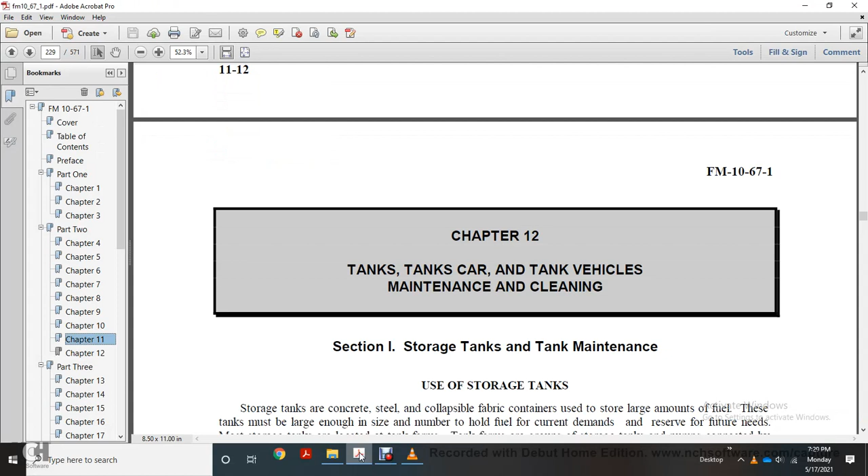Use of storage tanks. Storage tanks are concrete, steel, or collapsible fabric tanks used for the storage of large amounts of fuel. The tanks must be large enough in size and number to hold the current demand and future need. Most storage tanks are located in tank farms.

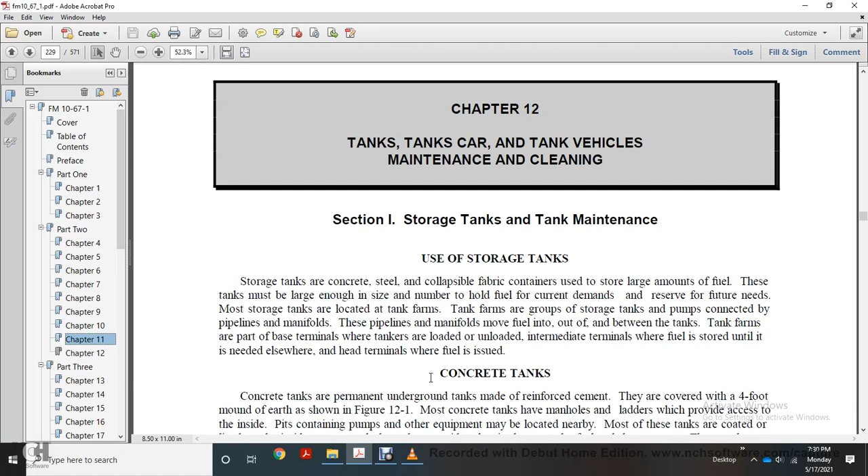Tank farms are groups of storage tanks with pumps connected to a pipeline manifold. The pipeline manifold moves fuel in and out between the tanks and the tank farms, used at the base terminal where tankers are loaded and unloaded, at intermediate terminals where fuel is stored until needed elsewhere, and at head terminals where fuel is issued.

Concrete tanks are permanent underground tanks made with reinforced cement. They're covered with about 4 feet of earth as shown in figure 12.1. Most concrete tanks have manhole ladders providing access to the inside, and pits containing pits, pumps, and other equipment may be located nearby.

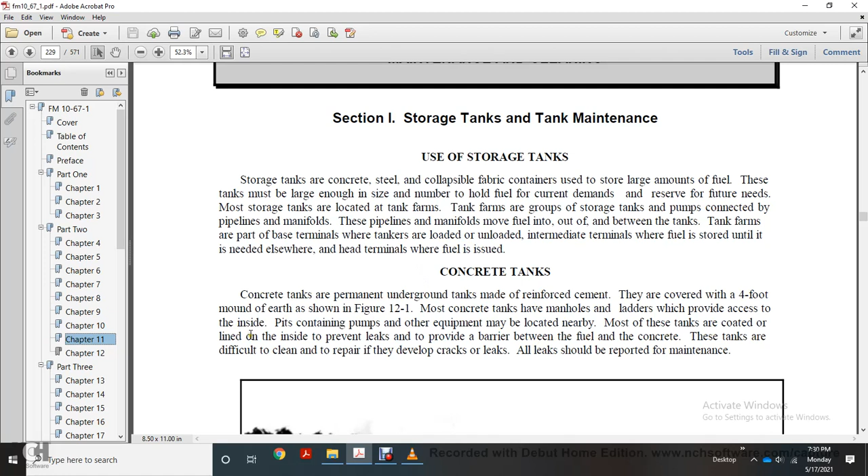Most tanks are coated or lined on the inside to prevent leaks and provide a barrier between fuel and concrete. These tanks are difficult to clean and repair if they develop cracks or leaks. All leaks should be reported to maintenance. The figure shows an earthen mound covering a concrete tank.

Steel tanks are made with metal plates called staves. The staves are bolted or welded together. Bolted tanks are shown in figure 12.2, and come in 100, 150, 250, 1,000, 3,000, and 10,000 barrel sizes.

Neoprene rubber gaskets are used to seal the edges of the staves to prevent leaks. Bolted tanks are used above ground, semi-permanent, because they can be taken down and reassembled at a new location. Bolted steel cone roof tanks used extensively by the military have free vents for high vapor loss. Welded tanks are shown in figure 12.3, page 12.3.

When tank volume exceeds 10,000 barrels of fuel, they are built as permanent, above-ground or buried tanks covered with cement or earth, because construction requires skilled personnel. Above-ground tanks may have floating roofs, as shown in figure 12.4, page 12.3.

This roof moves up and down with the fuel level, reducing the vapor space above the fuel and lessening the chance of fire or explosion. The welded cone roof tank is better suited for storage of highly volatile products than the bolted steel tank. In areas subject to bad weather, floating roof tanks with permanent covers or domes have been developed for use.

Above-ground bolted or welded tanks shall be built on a level foundation with adequate drainage; a concrete slab or concrete ring foundation is preferred. The outside of above-ground tanks shall be painted a light color to protect them from corrosion and reflect heat. Each tank shall be surrounded with a firewall high enough to contain all fuel in the tank in the event of a leak, and a safety margin of 1 foot shall be added to the height of the firewall.

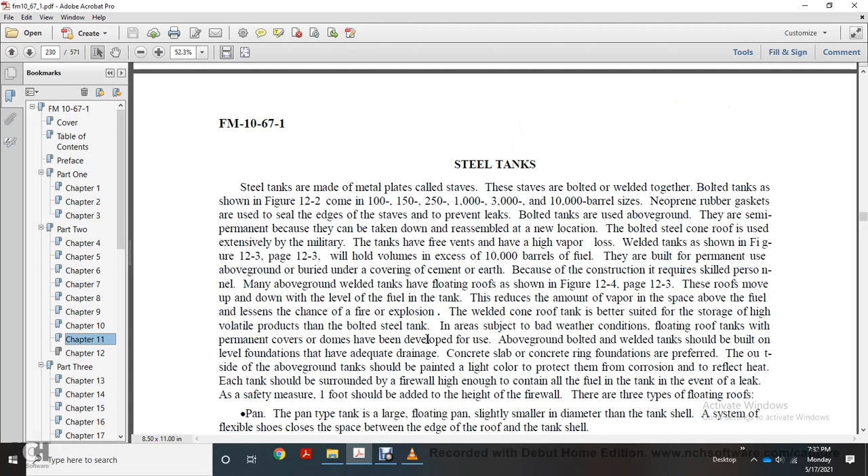The three types of floating roofs are pan, pontoon, and double deck. The pan type is a large floating pan, slightly smaller in diameter than the tank shell, using a flexible shoe to close the space between the edge of the roof and the tank shell. Pontoon tanks have a system of closed compartments or pontoons improve the floating stability and simplify the structure.

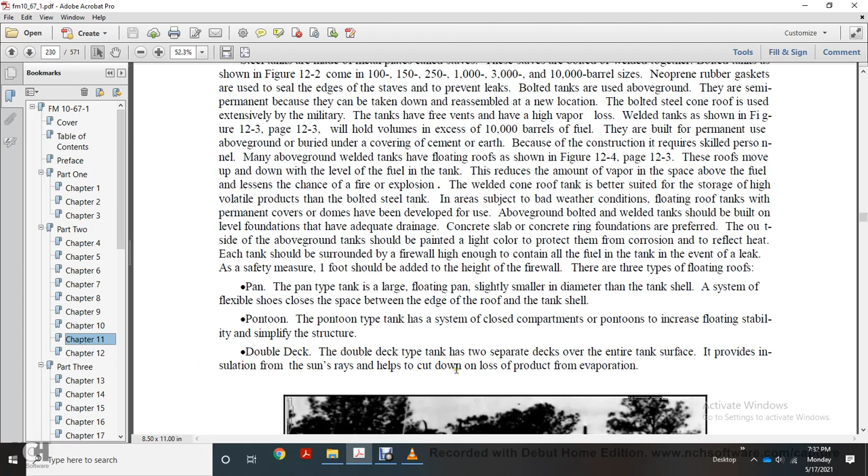Double deck floating roof tanks have two separate decks over the entire tank surface, which provides insulation from the sun's rays and helps cut down product loss from evaporation.

Figure 12.2 shows a bolted steel tank, figure 12.3 shows a welded steel tank, and figure 12.4 shows the cross-sectional view of a floating roof tank.

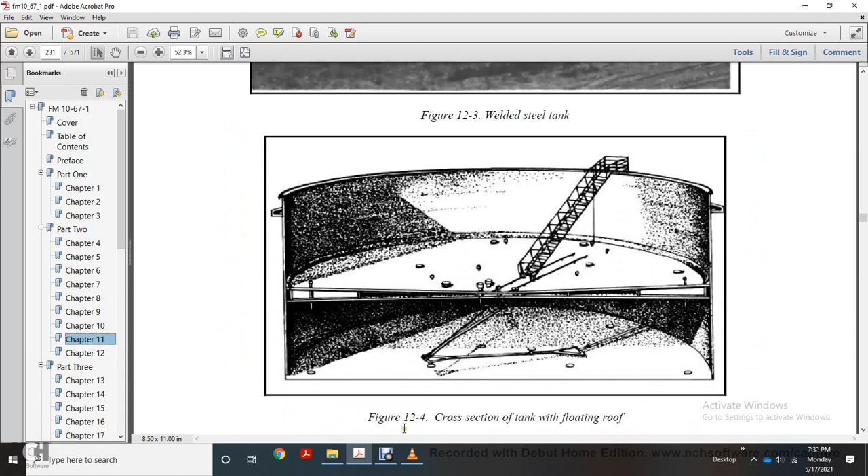Collapsible tank: Collapsible fabric tanks are shown in figure 12.5, made with elastomeric-coated nylon, currently available in 3,000, 10,000, 50,000, and 210,000 gallon sizes, used for temporary fuel storage at beachheads, FSSPs, and tank farms.

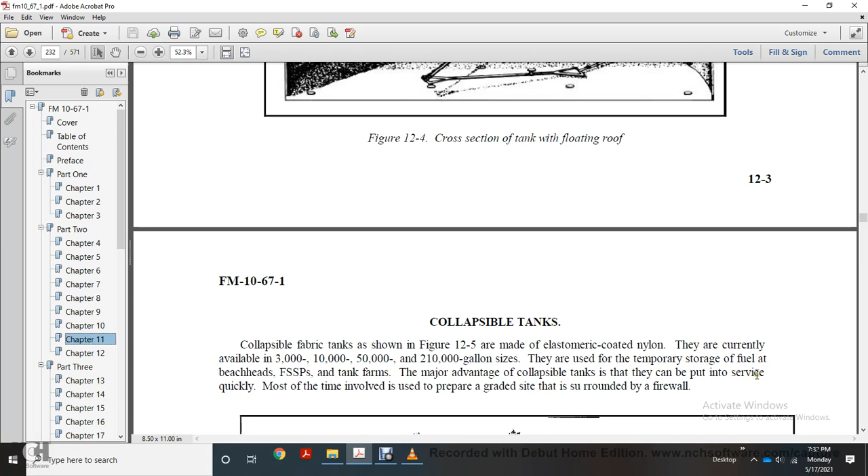The major advantage of the collapsible tank for tank farms is that it can be put into service quickly; most of the time involved is in preparing a graded site surrounded by a firewall. Figure 12.5 shows the collapsible fabric tank.

The inspection should be taken whenever the tank conditions show evidence of exterior excessive interior rusting, liner deterioration, and microbiological problems, both sludge and the ability of the tank to maintain the quality and integrity of the product being stored and issued. Any maintenance necessary should be performed as soon as possible. The results of the inspection and maintenance of the storage tank should be recorded on DA Form 4177.

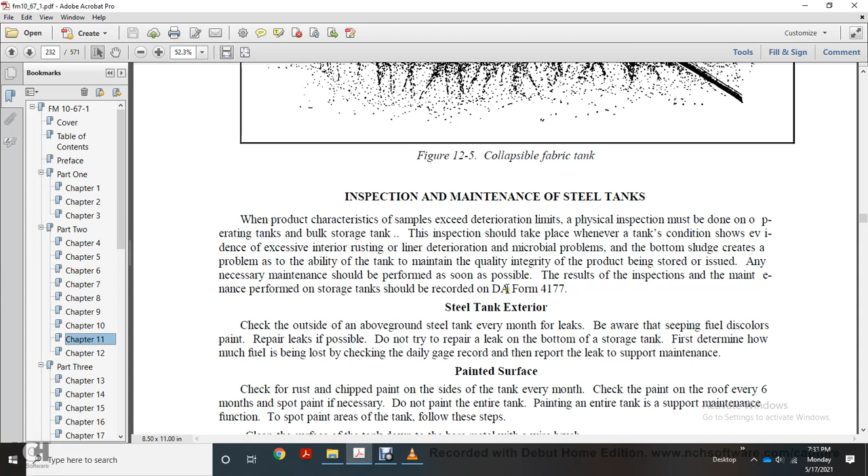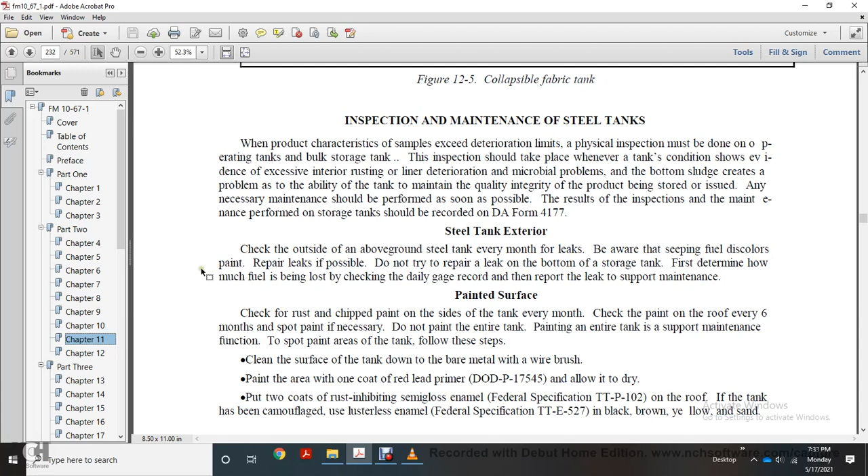Exterior tank, steel tank exterior: check the outside of the above ground steel tank every month for leaks. Be aware of seeping fuel and discolored paint. Repair the leak if possible. Do not try to repair a leak at the bottom of the storage tank until you first determine how much fuel is being lost, checking the daily gauge record, and then report the leak to support maintenance.

Painted surface: check for rust and chipped paint on the side of the tank every month. Check the paint on the roof every 6 months and spot paint as necessary, but do not paint the entire tank. Painting the entire tank requires support maintenance functions; only spot paint the areas needed on the tank.

Follow these steps: clean the surface of the tank down to bare metal with a wire brush. Paint the area with 1 coat of red lead primer, DOD P17545, and allow to dry. Put 2 coats of rust inhibitor semi-gloss, federal specification TTP-102, on the roof. If the tank has been camouflaged, use lusterless enamel, federal specification TTE-527, in black, brown, yellow, or sand.

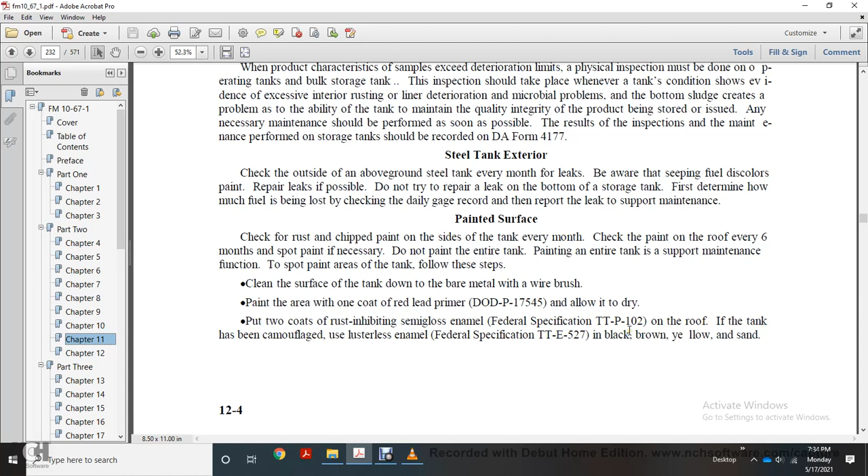Floating roof: check the seal over the floating roof frequently. Make sure it is in good condition, tight and sealed. Report any damage to support maintenance. Check the roof daily in rain, freeze, or snowy weather. If the seal has frozen to the tank surface, unfreeze the seal before raising or lowering the roof. Shovel the snow off the side of the tank as soon as possible to prevent collapse of the roof from the weight of snow.

Swivel joint pipe drain hose: drain the water off the roof daily. Open the roof drain valve located on the tank shell at the bottom of the swivel pipe drain hose. Keep the pipe drain free of water during freezing weather.

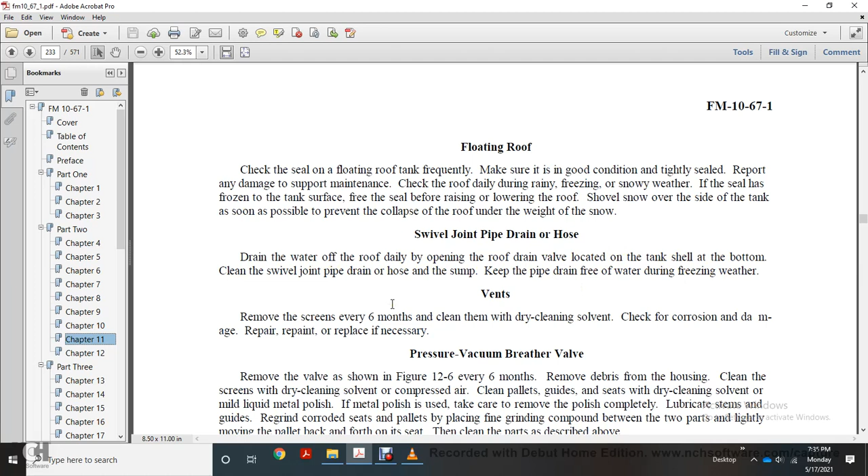Vents: remove the screen every 6 months and clean with dry cleaning solvent and a cloth. Check for corrosion and damage, repair and repaint as needed.

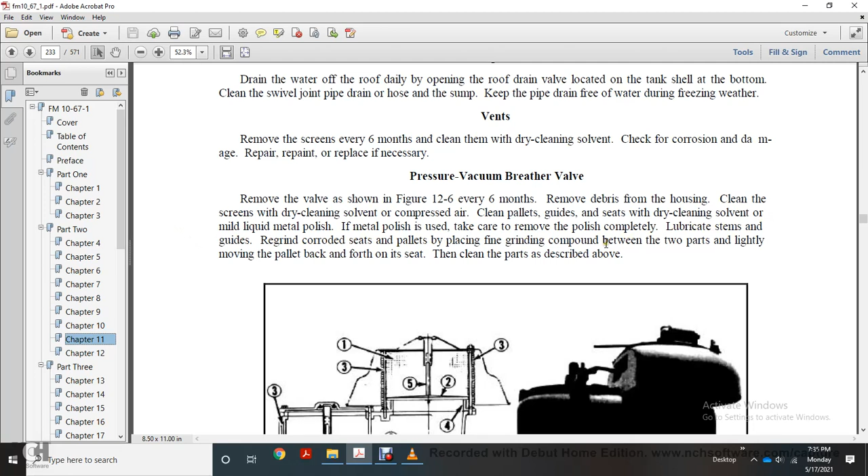Pressure vacuum breather valve: remove the valve as shown in figure 12.6 every 6 months. Remove debris from the housing, clean the screen with dry cleaning solvent and compressed air, clean the pallets and guides with dry cleaning solvent and mild liquid metal polish. Metal polish should be used with care. Remove the polish completely, lubricate the stem and guide, and regrind corroded seats and pallets using fine grinding compound between the two parts, lightly moving the pallet back and forth on the seat. Clean the parts as described: 1 is screens, 2 is pallets, 3 is guides, 4 is seats, 5 is stems.

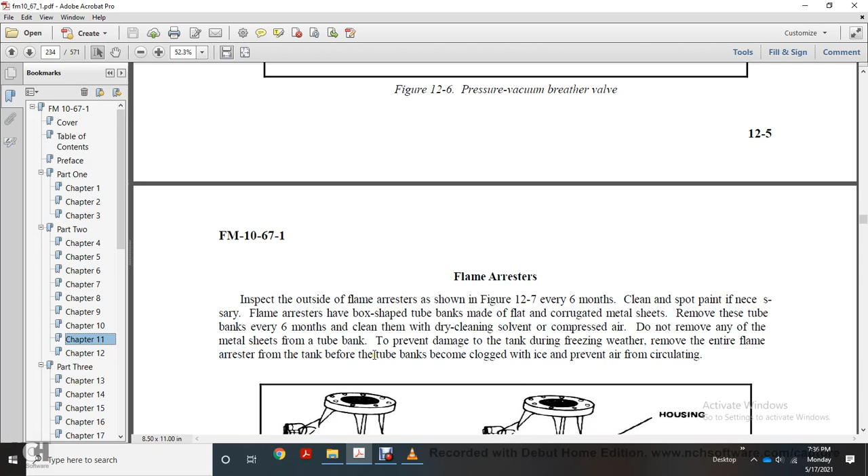Pressure vacuum breather valve, flame arrestor: inspect inside and outside the flame arrestor as shown in figure 12.7. Every 6 months, clean and spot paint as necessary. The flame arrestor is box-shaped tube banks made of flat corrugated metal sheets. Remove these tube banks every 6 months and clean with dry cleaning solvent and compressed air. Do not remove metal sheets from the tube banks. To prevent damage to the tank during freezing weather. Remove the entire flame arrestor from the tank before the banks become clogged with ice, which prevents proper circulation. This shows the housing of the two banks and the cover, the flame arrestor and banks.

Liquid level gauge: follow the manufacturer's instructions for maintenance if necessary. Place silica gel inside the gauge to absorb moisture and prevent condensation in the glass.

Gauge and thief hatch: check the hatch cover once a year and replace if damaged. Remove the pins in the hatch, put a new cover in place, and replace the pins. Check the seal of the cover once a year for cracks or damage, and replace the seal if necessary.

Manhole cover: check the manhole cover gaskets regularly and replace if damaged. For the cover gasket, remove the pins, washers on the hinge, remove the damaged gasket, put a new cover and gasket in place, and replace the pins and washers.

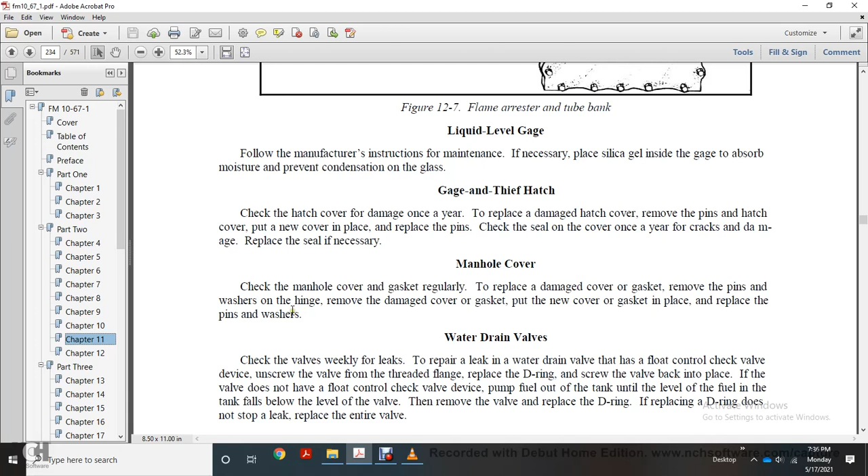Water drain valves: check the valves weekly for leaks. Repair a leaking water drain valve with a float control check valve device. Unscrew the valve from the threaded flange, replace the D-ring, and screw the valve back into place.

If the valve does not have a float control check valve device, pump fuel out of the tank until the level falls below the valve. Then remove the valve and replace the D-ring. If replacing the D-ring does not stop the leak, replace the entire valve.

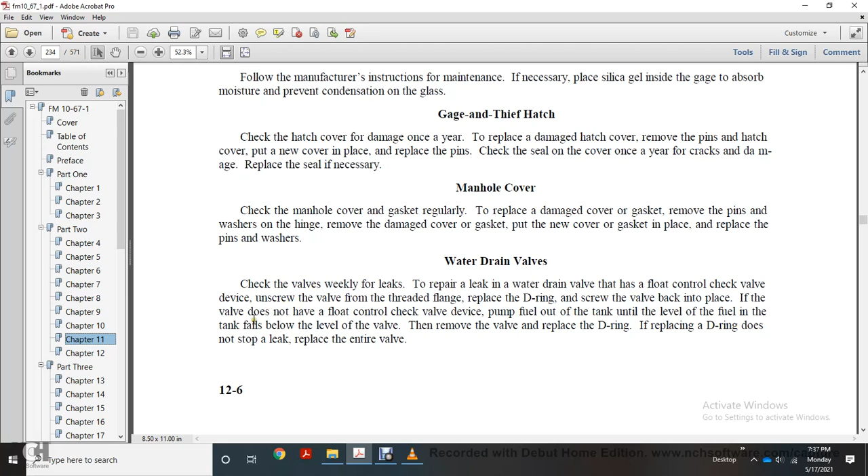Tank stairways, ladderways, handrails, platforms, and catwalks: check these areas to make sure they are safe to use and securely attached to the tank. Locate corrosion or broken parts and repair, repaint, or replace as needed. Pay special attention to hollow handrails, which may be corroded on the inside.

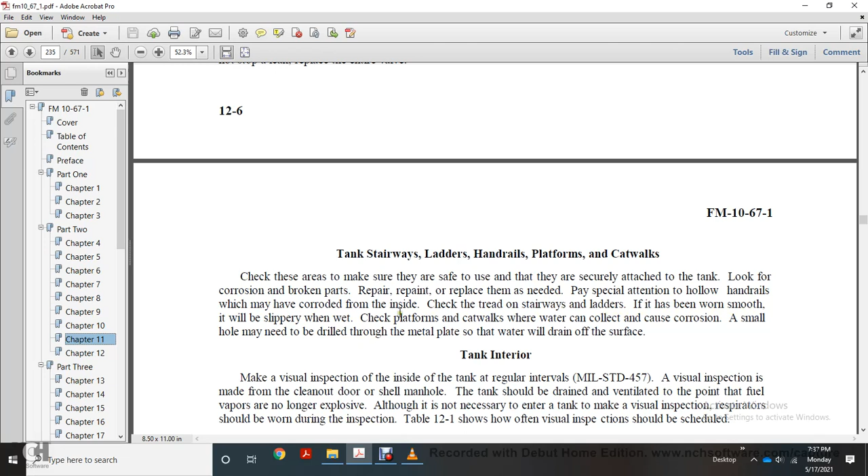Check treads on stairways and ladders that have been worn smooth, as they will be slippery when wet. Check platforms and catwalks where water can collect and cause corrosion. A small hole may need to be drilled through the metal plate so water will drain off the surface.

Tank interior: make a visual inspection inside of the tank at regular intervals per Military Standard 457. The visual inspection is made through a clean-out door or a manhole. The tank shall be drained and ventilated until the fuel vapor is no longer explosive. Although it is not necessary to enter the tank to make a visual inspection, respirators should be worn during inspection.

Table 12.1 shows how often visual inspections should be performed, for inside tank coatings, filter separators, incoming fuel, and frequency.

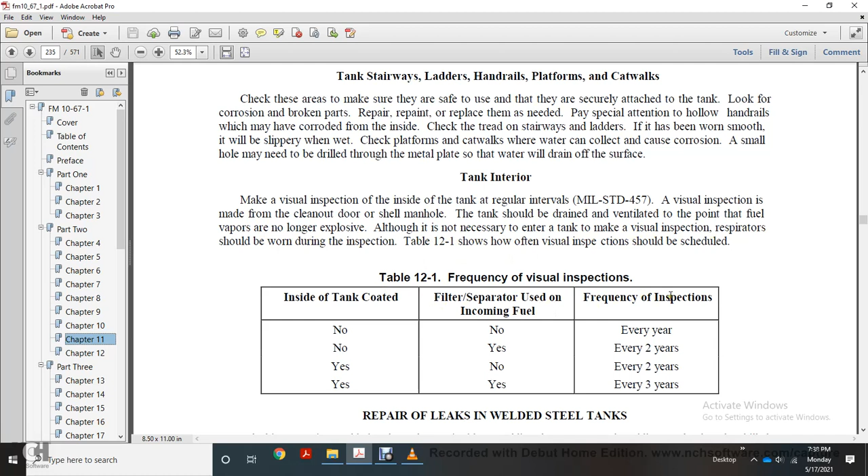Repair leaks in welded steel tanks. A leaking seam of a welded tank is repaired by re-welding the seam. Such welding must be done by a skilled welder per TM 9-237. The tank must be drained and free of fuel vapor.

After obtaining a permit from the safety officer, weld using the following steps: move firefighting equipment near the tank, make sure welders wear protective clothing and shoes, remove the paint from the surface of the repair area with a wire brush, make sure welders use the right type of electrodes, and repaint the area after the leak has been fixed.

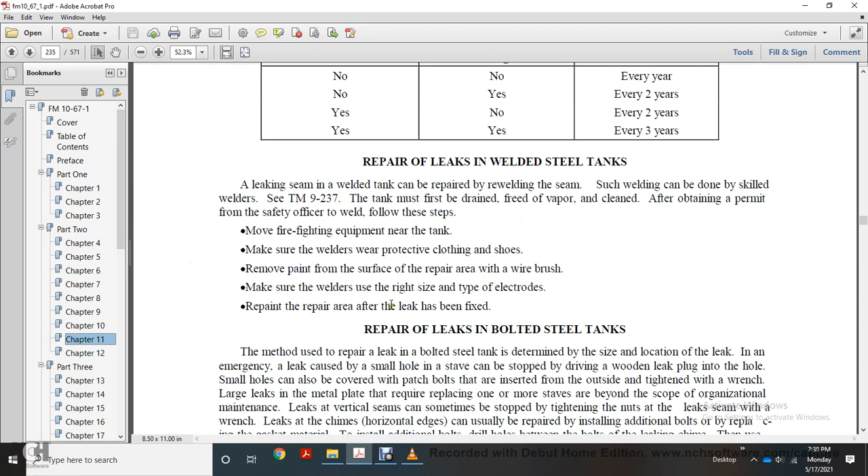Repair of leaks in bolted steel tanks. The method used depends on determining the location of the leak. In an emergency, a small hole in a stave can be stopped by driving a wooden leak plug into the hole. Small holes can also be covered with a patch, with bolts on the outside tightened with a wrench.

Leaks at the chime, at horizontal edges, can be easily repaired by installing additional bolts or replacing gasket material. To install additional bolts, drill holes between the bolts of the leaking chime, use a new washer, insert the bolt into the new hole, securely tighten the nut on each bolt, and install new gasket material.

Take out enough bolts from the leaking chime to remove the gasket material around the leak, then cut out the damaged section of the gasket material. Caulk the area with putty and use a new gasket washer on the bolts, then put the bolts back and tighten the nuts.

Before many repairs can be made, the tank must be drained to a level below the leak. Repairers must enter the tank to make or finish repairs, and the tank must be completely drained. No one should enter the tank until fuel vapor is below the explosive limit.

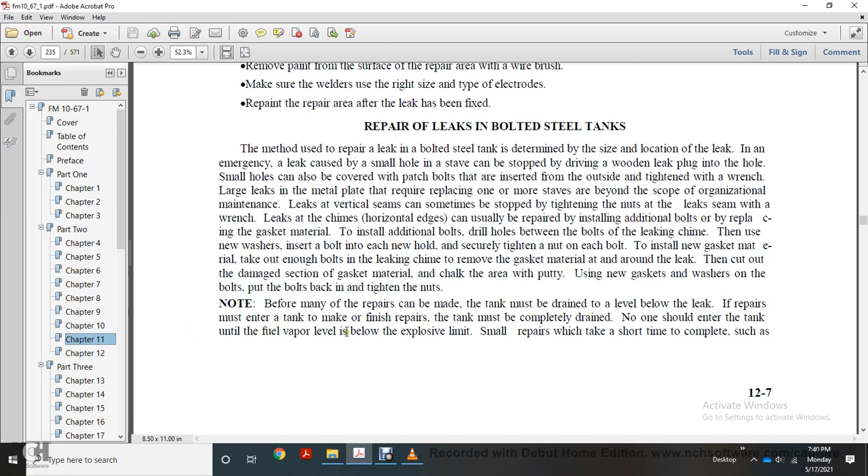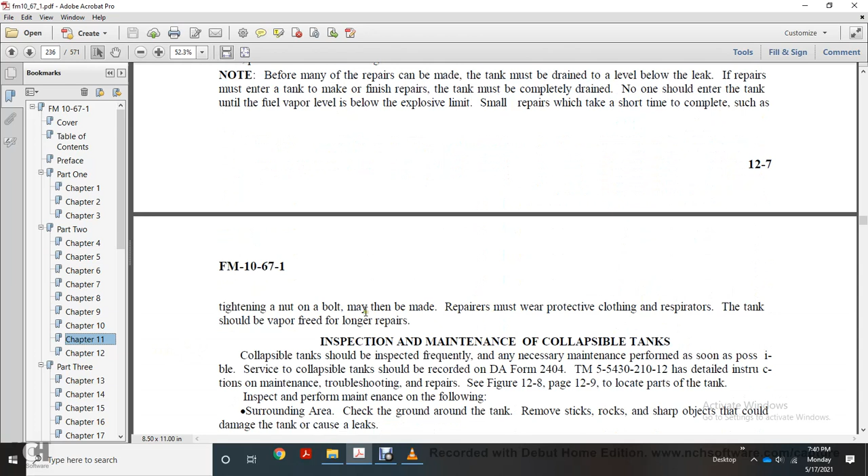Small repairs which take a short time to complete, such as tightening a nut or bolt, may be made with repairers wearing protective clothing and a respirator. The tank should be vapor-free for longer repairs.

Inspection and maintenance of collapsible tanks. Collapsible tanks should be inspected frequently, with necessary maintenance performed as soon as possible. The inspection of the collapsible tank should be recorded in DA Form 2404. Technical Manual 5-5430-210-12 gives detailed instructions on maintenance and troubleshooting repair; see figure 12.8 on page 12.9 to locate parts of the tank.

Inspect the area while performing maintenance and check the ground area around the tank. Remove sticks, rocks, and sharp objects that could damage the tank or cause a leak. Tank exterior: clean the tank and check for tears, holes, loose handles, and leaks. Make repairs if possible to fill and discharge parts.

Check the fittings, elbows, and holes for signs of damage or leaks as necessary. Clean with dry cleaning solvent and replace worn gaskets and packing. Check the vent pipe and coupling dust cap for damage, and look for signs of a leak.

Clean all the parts with dry cleaning solvent and make sure the dust cap operates freely. Relieve the pressure at the drain fitting located at the bottom of the tank. Check the fitting and hose for leaks; replace worn packing and clean all parts with dry cleaning solvent.

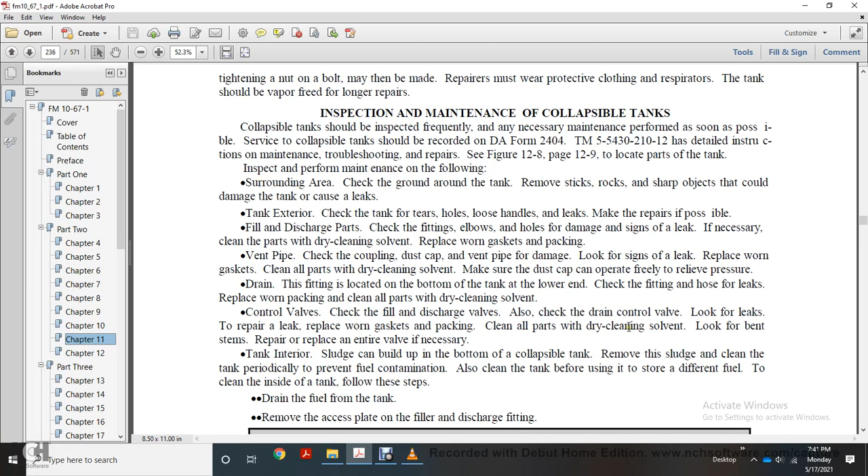Control valves: check the fill and discharge valve, and check the drain control valve. Look for leaks and repair them. Replace worn gaskets and packing. Clean all parts with dry cleaning solvent. Look for bent stems, repair as needed, and replace the entire valve if necessary.

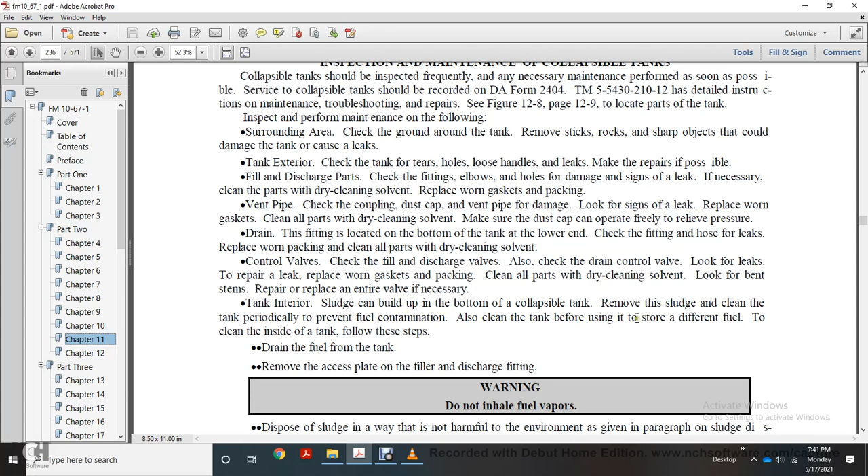Tank interior: sludge may build up at the bottom of a collapsible tank. Remove the sludge and clean the tank periodically to prevent fuel contamination. Also clean the tank before switching to a different type of fuel. Clean the inside of the tank.

Follow these steps: drain the fuel from the tank, and remove the access plate on the filler and discharge fitting. Warning: do not inhale the fuel vapors. Scoop out the sludge carefully to avoid harmful exposure.

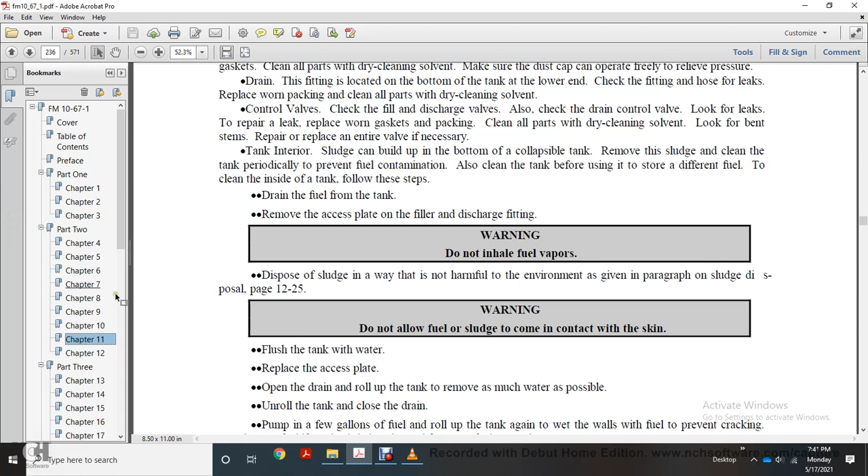Dispose of sludge in accordance with environmental disposal page 12-25. Warning: do not allow fuel or sludge to come into contact with the skin. Flush the tank with water, then replace the access plate.

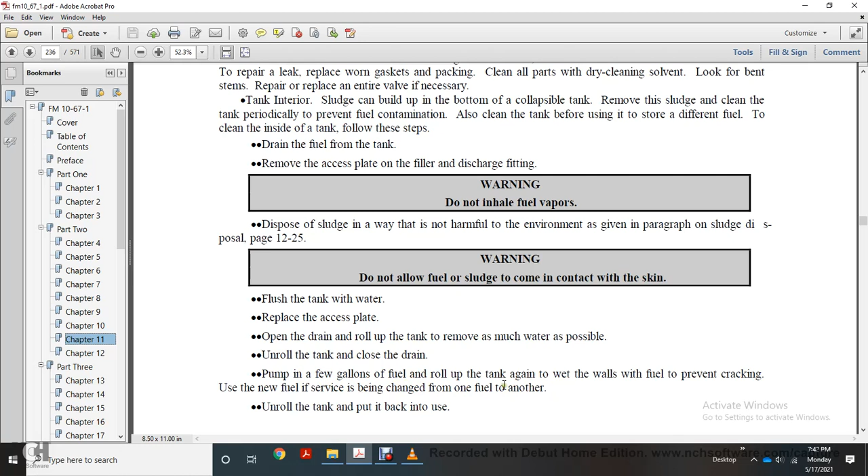Open the drain and roll up the tank to remove as much water as possible. Unroll the tank and close the drain. Pump in a few gallons of fuel, then roll up the tank again to wet the walls with fuel to prevent cracking. Use the new fuel if service is being changed from one fuel type to the other. Unroll the tank and put it back into use.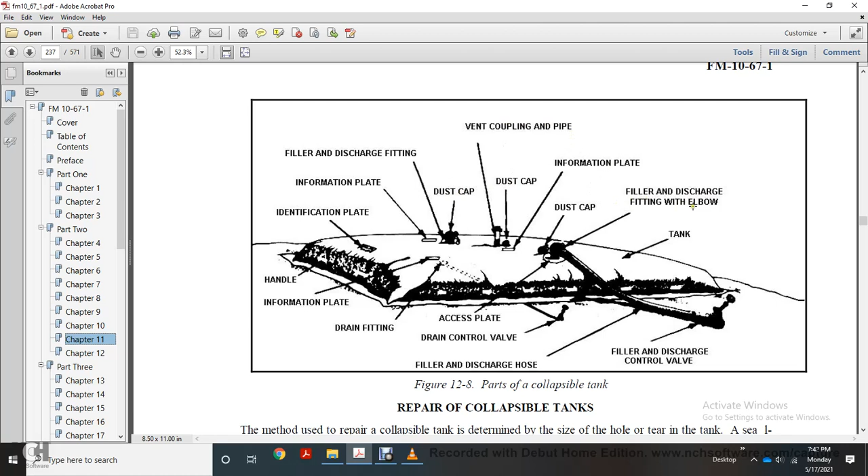Repairing the collapsible tank: the method of repair is determined by the size of the hole in the tank area, the tear of the tank, and the sealing plug used. For repair of holes up to 3/8 inch wide, use a sealing plug. For holes larger than 3/8 of an inch, use a sealing clamp, for tears up to 7 inches.

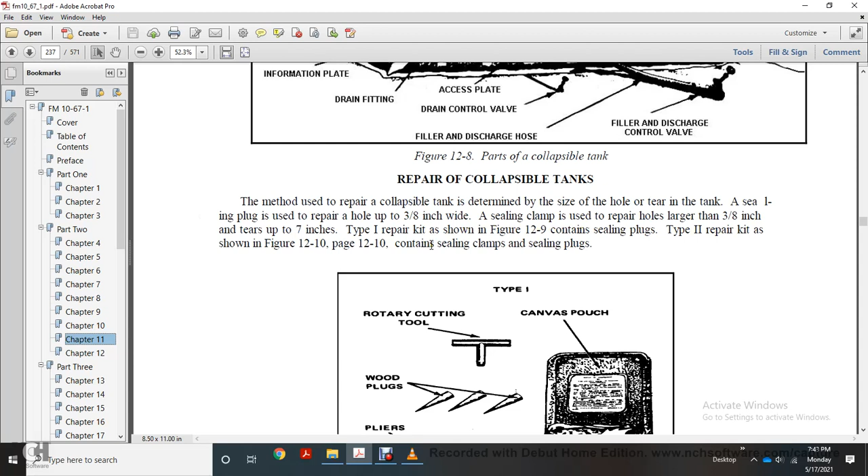The Type 1 repair kit, shown in figure 12.9, contains sealing plugs. The Type 2 repair kit, shown in figure 12.10 on page 12.10, contains sealing clamps and sealing plugs.

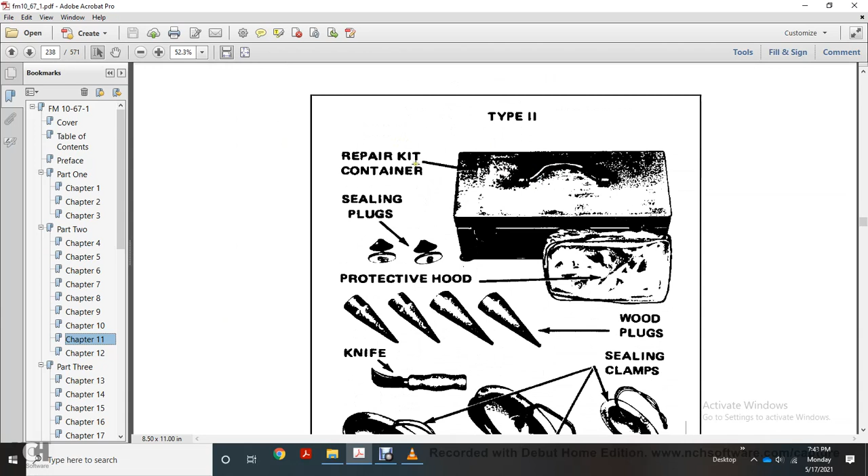Figure 12.9, Type 1 kit: rotary cutting tool, wood plugs, pliers, sealing plugs, for holes no greater than 3/8 of an inch, in a canvas pouch. Type 2 repair kit: sealing plugs, protective hood, wood plugs, knife, and sealing clamps, for holes greater than 3/8 of an inch and tears up to 7 inches.

To repair a tank with a sealing plug, follow these steps: put on the protective hood and rubber gloves, and put the wooden plug in the hole to stop the leak until repair materials are ready to use.

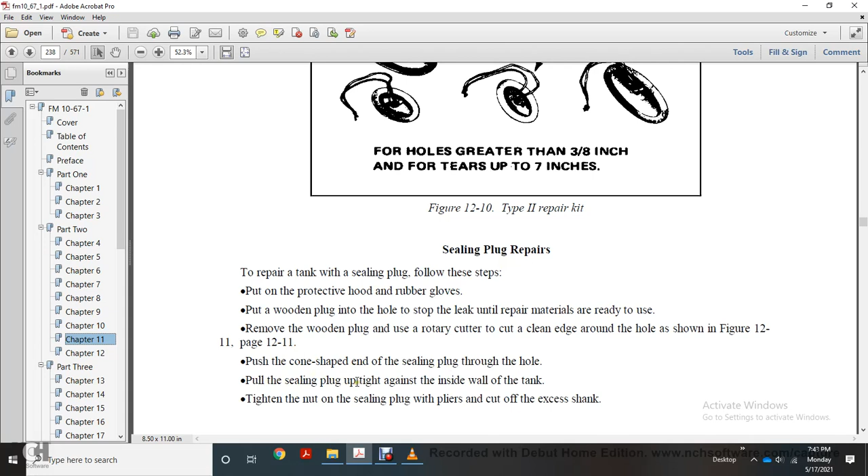Remove the wooden plug, rotary cutter to cut a clean edge around the hole as shown in figure 12.11 on page 12.11. Push the cone-shaped end of the sealing plug through the hole in the tank and pull the sealing plug tight against the inside wall of the tank. Tighten the nut on the sealing plug with pliers, and cut off the excess shank.

Figure 12.11 shows repairing the collapsible tank using sealing plugs.

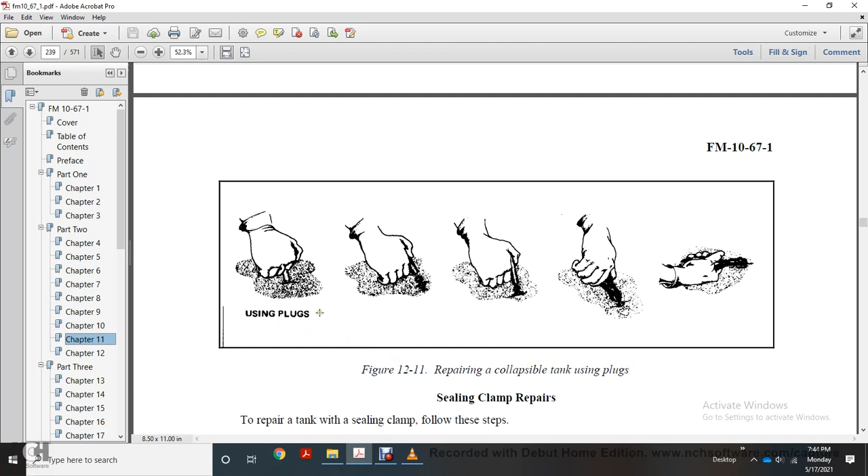Sealing clamp repairs: to repair the tank with a sealing clamp, follow these steps. Put on the protective hood and rubber gloves, and put in the wooden plug where possible to stop the leak until a sealing clamp has been selected.

Select the correct size of sealing clamp. The shorter side or width of the bottom plate of the clamp so it fits through the hole or tear. If necessary, extend the hole or tear slightly.

Use the knife and insert the bottom plate as shown in figure 12.12. Fold the hinge stud down and put the bottom plate through the tear. Straighten the stud and rotate the bottom plate so the longer side length of the bottom plate is in the same direction as the length of the tear.

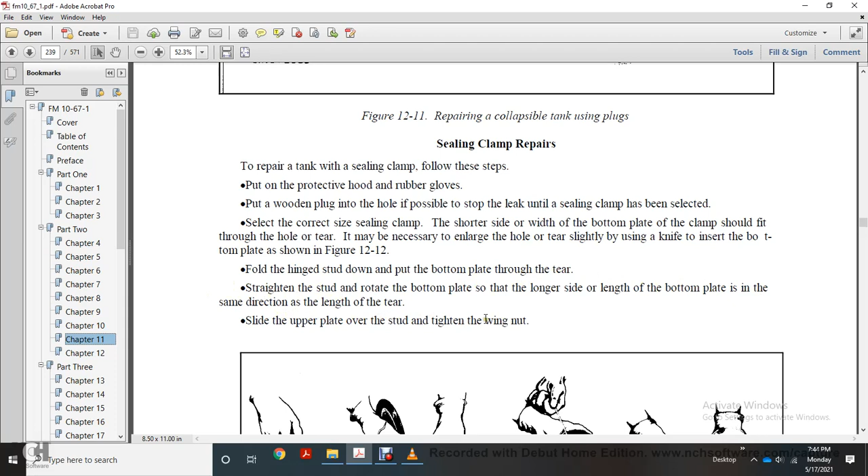Slide the upper plate over the stud and tighten the wing nut. Figure 12.12 shows repairing the collapsible tank using clamps.

Section 2: tank cleaning, precautions, equipment, and testing.